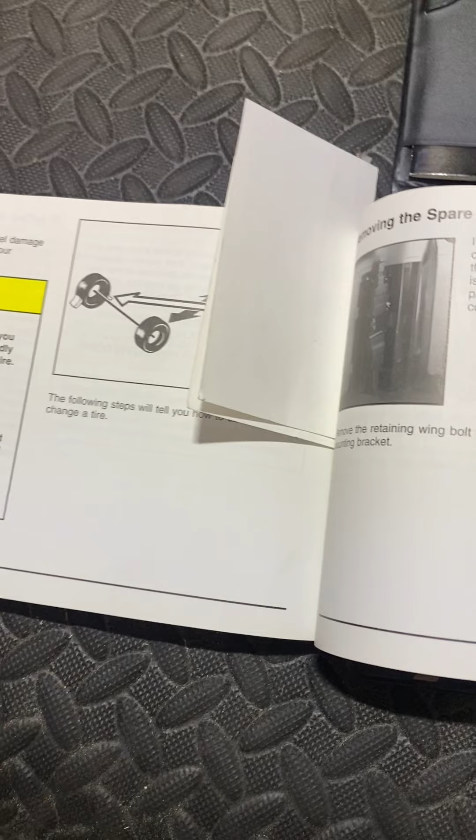Okay, so if you open your manual, which you probably don't have because you're watching this video, to page 5-66. I'm going to read this to you too, so that if you have to do this on the side of the road, you don't have to have your phone up to your ear.

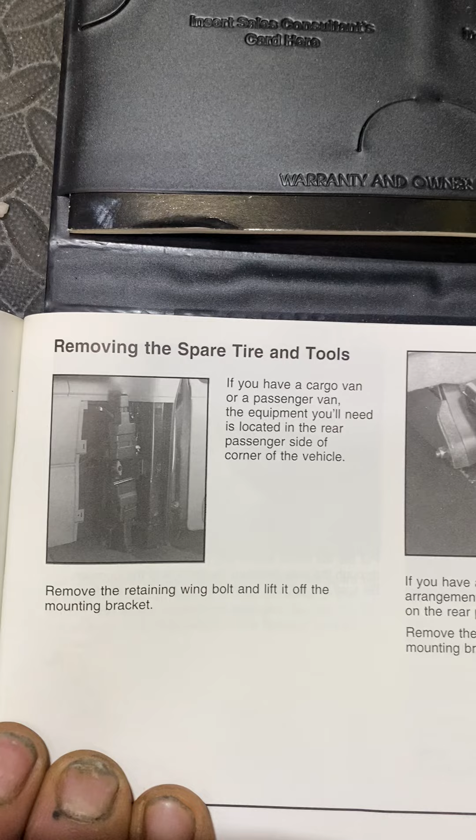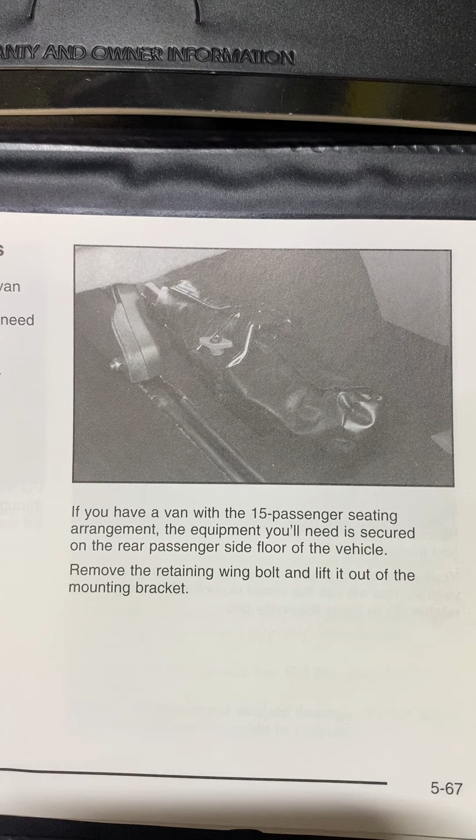All right, so first off, it's finding your spare tools. In my case, it's stowed in the passenger side rear corner. If you have a 15 passenger van, somebody's sitting on it, or whatever it says. Anyways, yeah, it's probably under the rear passenger side floor of the vehicle. Well, that sounds like fun. All right, on with it.

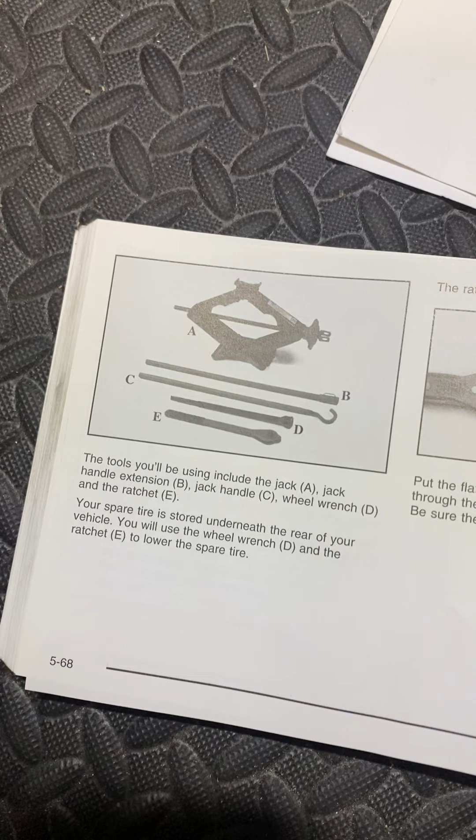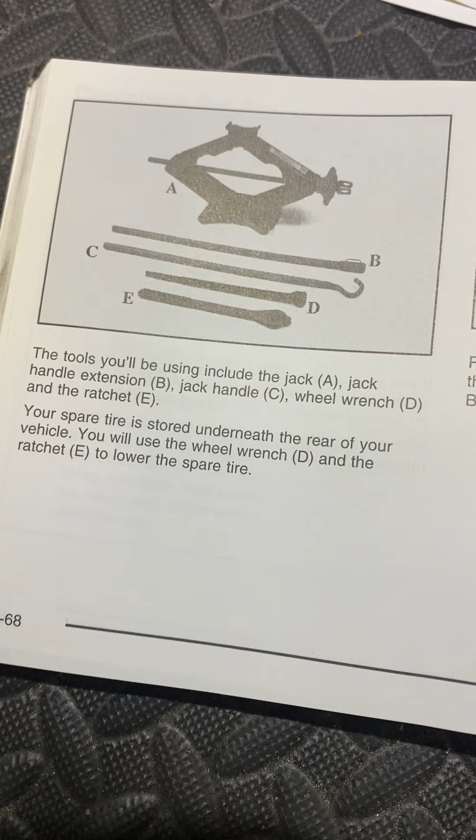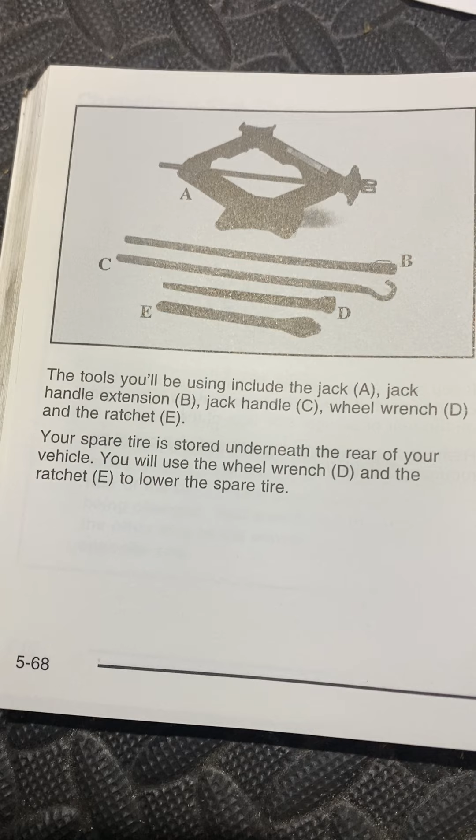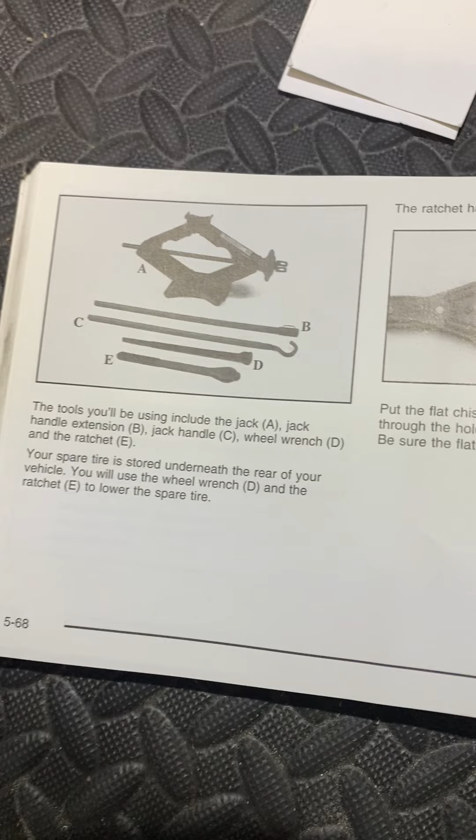Here's your tools that you're going to use, including your jack, which goes without saying, you're gonna need that. I also posted another video on how to fix this secondary jack clip, because if you blow a back tire, you're gonna be pissed. That's why I opted to cut my tab off and not have to deal with that thing seizing up on me again. So anyways, locate your tools, get your jack, everything, and your little ratchet, which apparently has a down and up setting on it, I guess.

Righty tighty, lefty loosey.

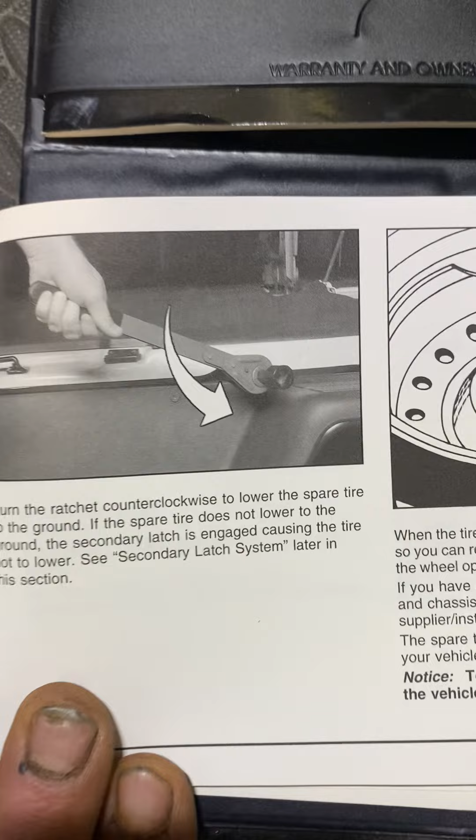So you're gonna go and locate your jack hole. In the back, if you open your back door, it's gonna be on your passenger side, just above your bumper. I don't know what this is saying, I'm just going off of whatever. Anyways, don't pay attention to my fingers, they're disgusting. I'm changing the oil on this pig again.

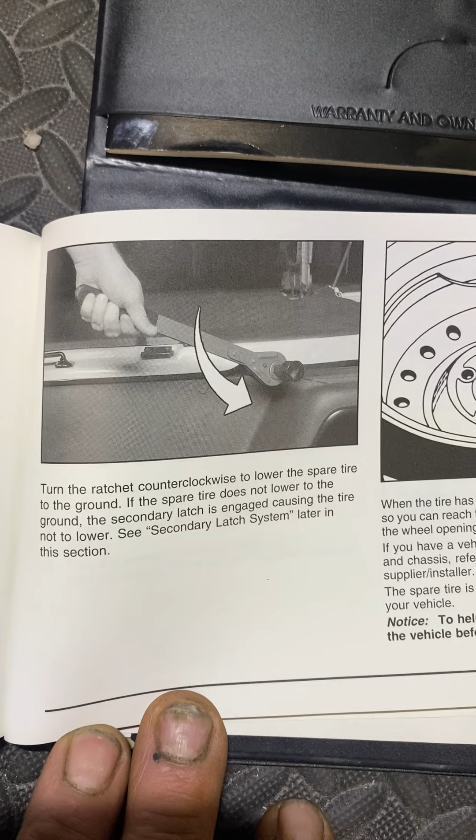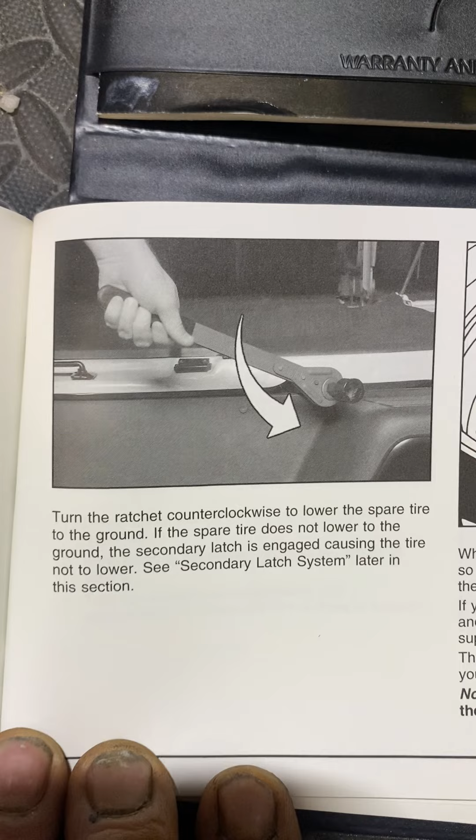So, secondary latch. Lower counterclockwise, obviously, like I said, lefty loosey, righty tighty. And if it does not lower, that means your secondary latch system is not disengaging.

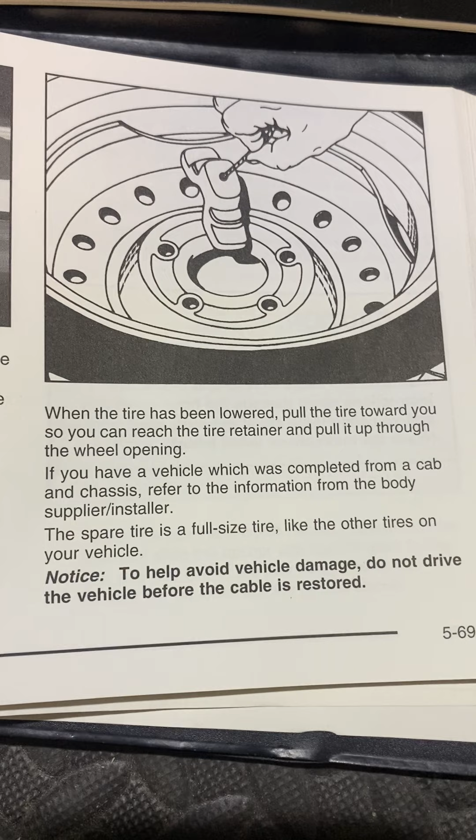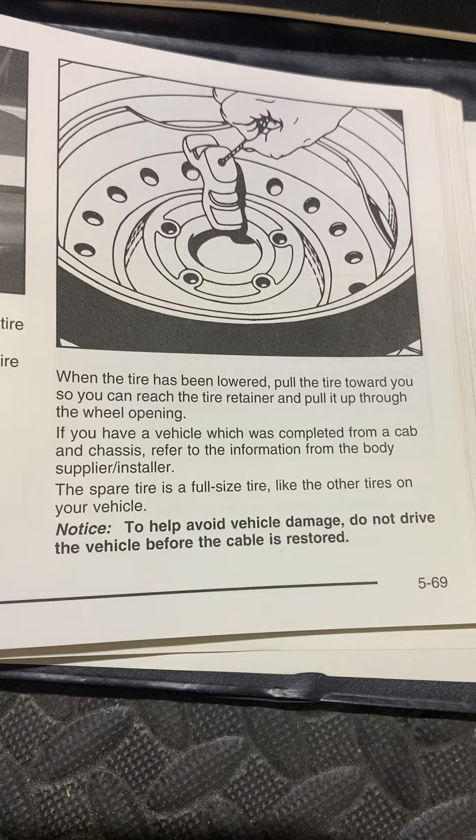However, I have a little thing to show you here so that you can understand what they're talking about, because it says when your tire has been lowered, pull your tire toward you so you can reach the tire retainer and pull it through the wheel opening. Yeah, it's not so fun because you can't get that freaking thing through the wheel. I mean, it's just a challenge because you have to have the thing propped up.

So yeah, and I apologize for the bouncing. I'm bending over, it's been a long day. Back is a little stiff.

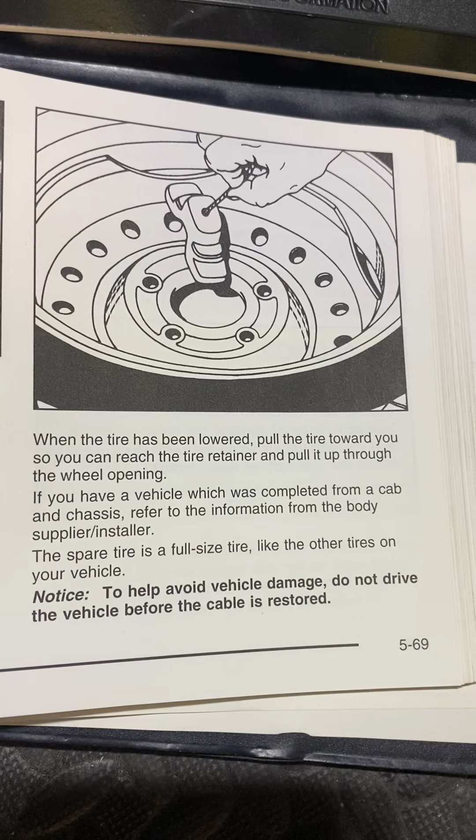So anyways, yeah, if your tire is full size, blah blah blah. Another thing to keep in mind is always keep your spare tire full of air. The one I pulled out of mine had 5 pounds in it, so that would have been really helpful.

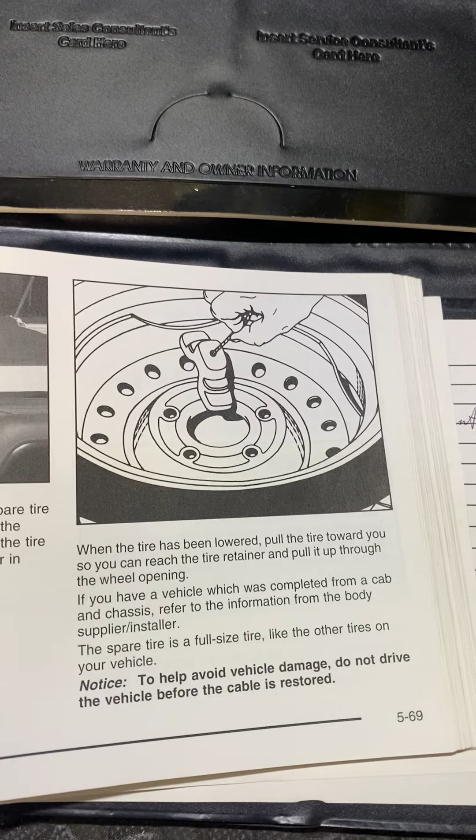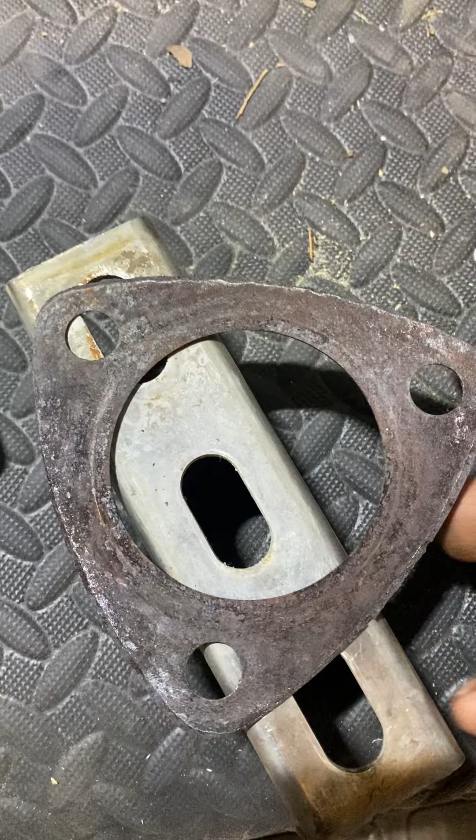Okay, so here's my little tutorial on this part here. All right, say this exhaust gasket, which I removed out of here, or no, actually I got this out of a piece of crap Saturn.

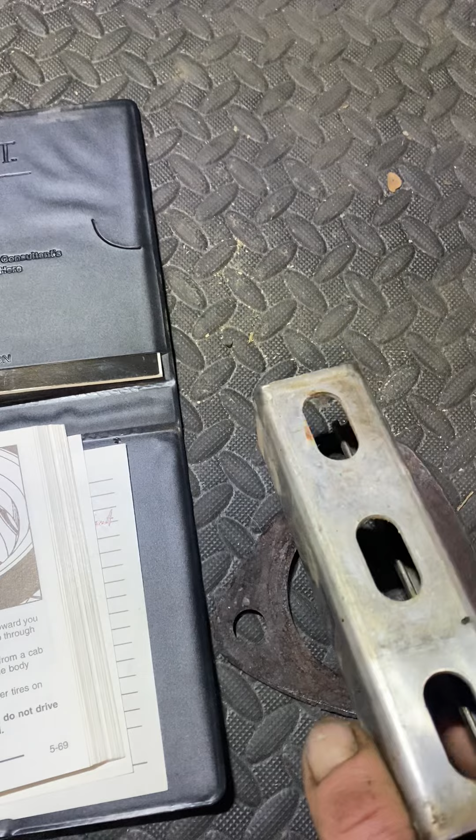All right, so say this is your tire opening right here, the center, where your holder is underneath. So you're gonna want to get the tire up in the air high enough to where you can get slack, because your cable is going to be coming out of this, coming up and through your tires. So you're going to want to get this whole thing up, and if I can do it one-handed, this is going to be awesome. Not really. But then you're going to want to get that sleeve with the cable, because the cable's coming out of here, remember. You're going to want to tip this up and slide it through the hole, and then your spare tire will be free. Depending on the condition of it, you might not be free to drive yet, but I am hoping that this helps and my nonsense doesn't screw you along.

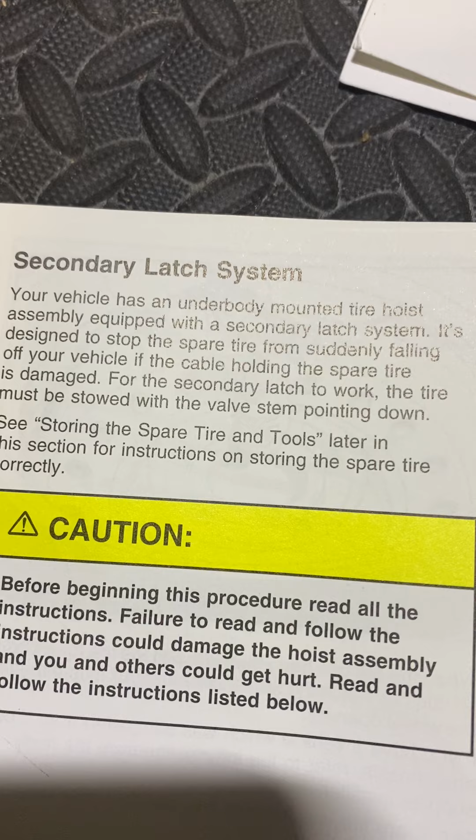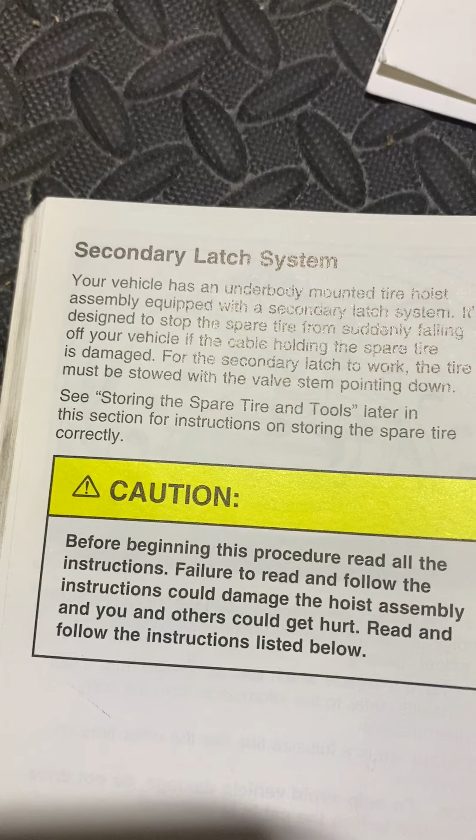Anyways, so your vehicle has an underbody mounted tire hoist assembly equipped with a secondary latch system. It's designed to stop the spare tire from suddenly falling off your vehicle and nailing the idiot that's tailgating you, which, I don't know, it doesn't say that, but anyways, if you're just listening you're probably getting totally misguided or getting bad ideas. So for the secondary latch to work, the tire must be stowed in the valve stem pointing down position.

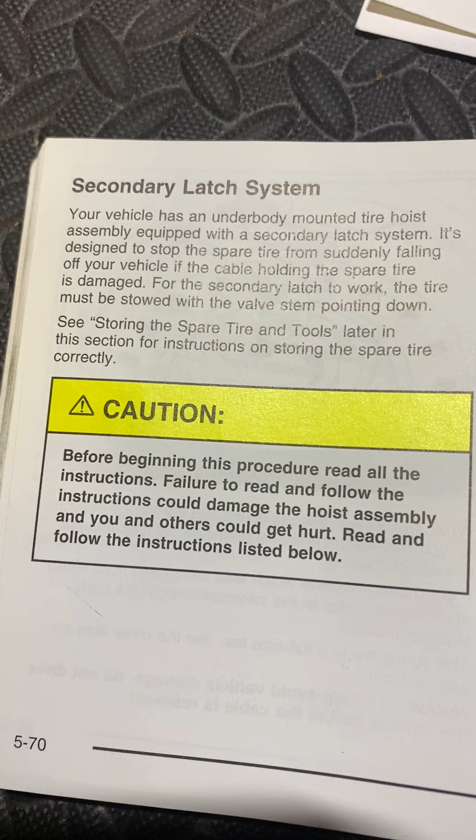Storing the spare tire and tools in a later section, whatever. Before beginning this procedure, read all the instructions - or I'm going to read them for you. Failure to read the following could result in damage to the hoist, or others could get hurt. So to release the spare tire from the secondary latch, do the following.

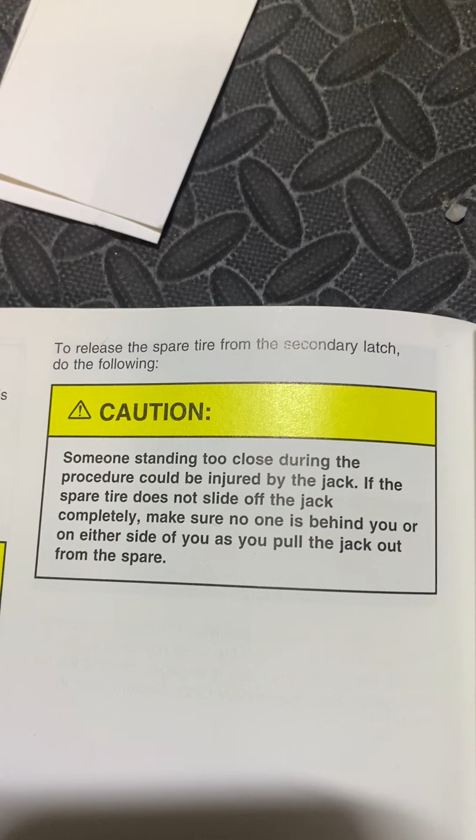Someone standing too close during the procedure could get injured by the jack, because the jack is very angry. I've known a couple jacks before and they were always pissed.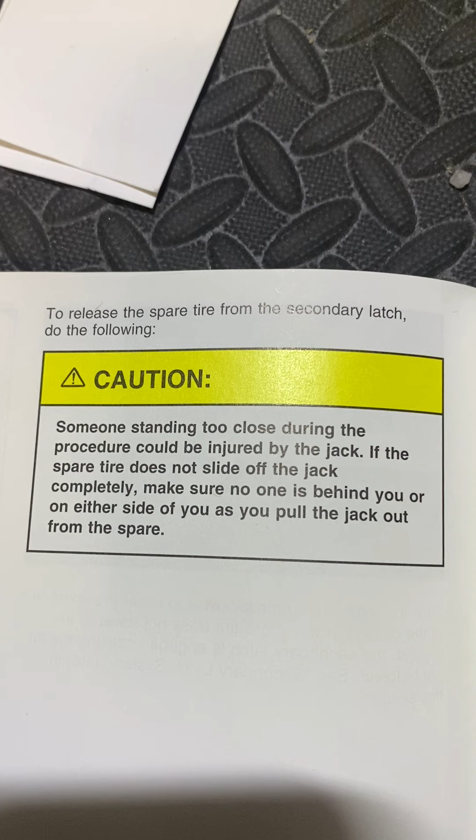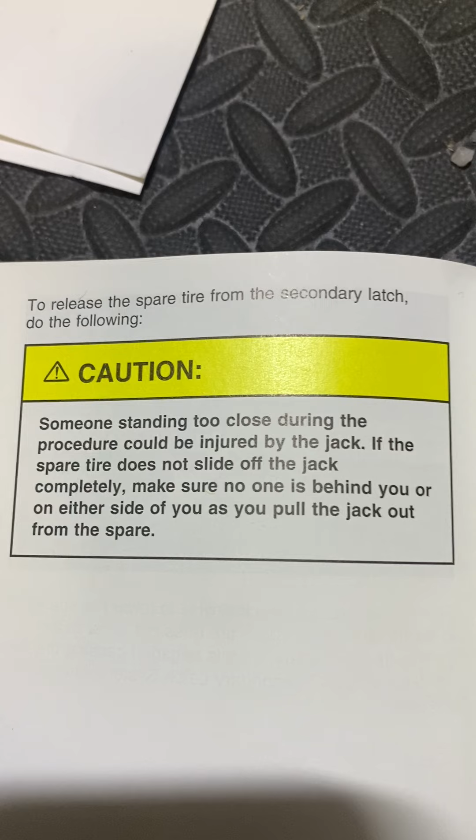So if the spare tire does not slide off the jack - wait, what? If the spare tire does not slide off the jack completely, make sure nobody's behind you or on either side of you as you pull the jack out from the spare tire. Why? Because you're gonna start crying, or you just don't want witnesses?

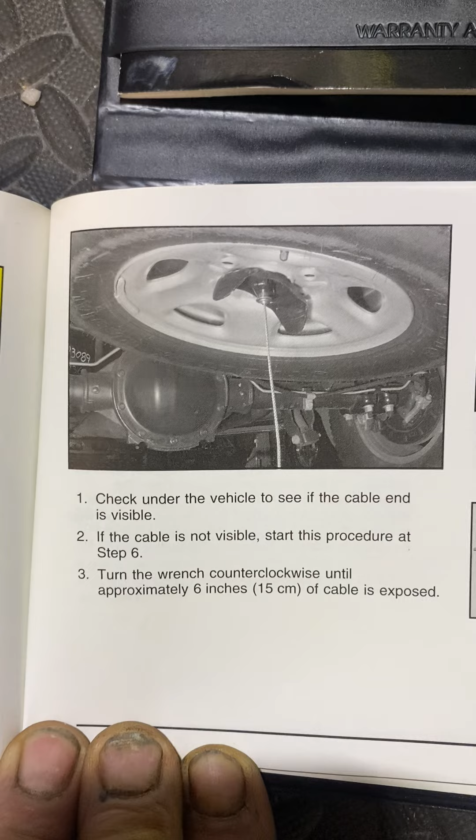Okay, so then check under the vehicle to see if the cable is visible, assuming you've already lowered the cable as much as you could. If the cable is not visible, start this procedure at step 6.

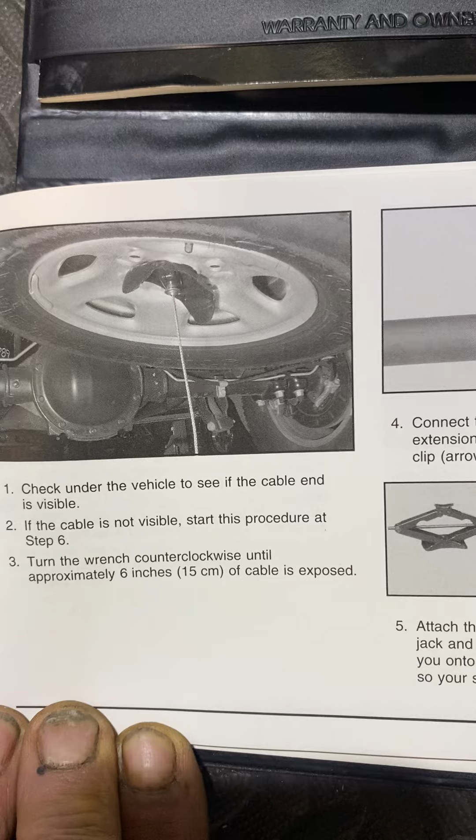All right, so we're still on step 3. Turn the wrench counterclockwise approximately 6 inches, or until approximately 6 inches of cable is exposed. And then you're gonna want to put this stupid little clip in, which always frustrates me. Connect the jack handle, blah blah blah.

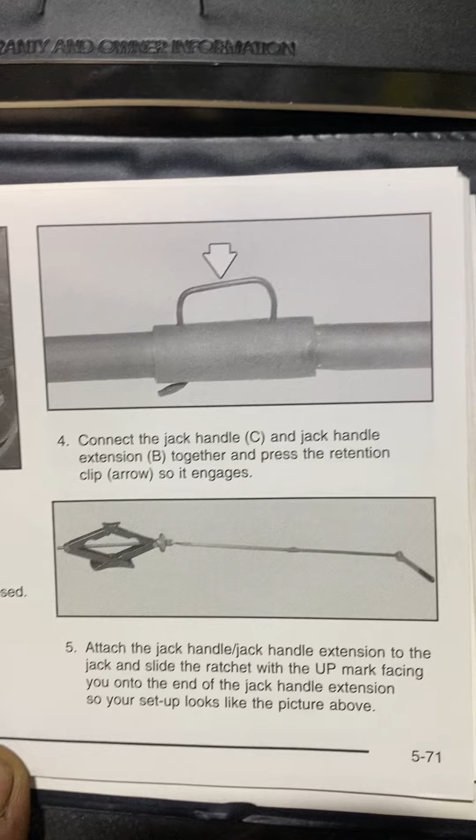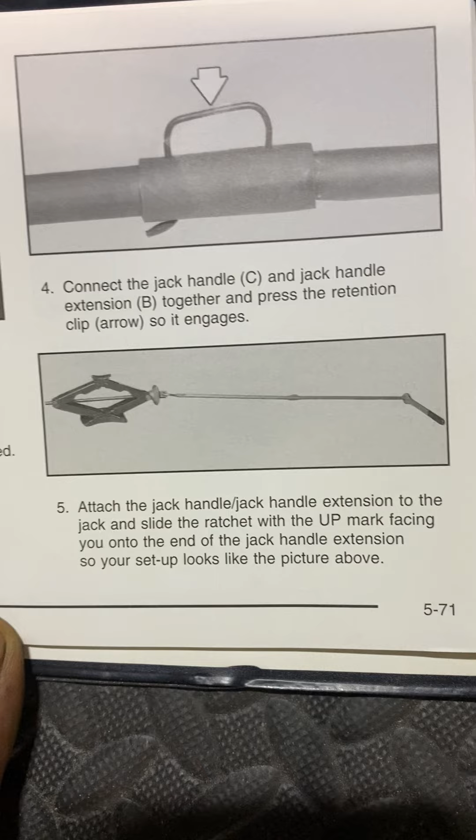Press the retention clip so the arrow engages. Attach the jack handle extensions to the jack and slide the ratchet, with the up mark facing you, onto the end of the jack handle extension.

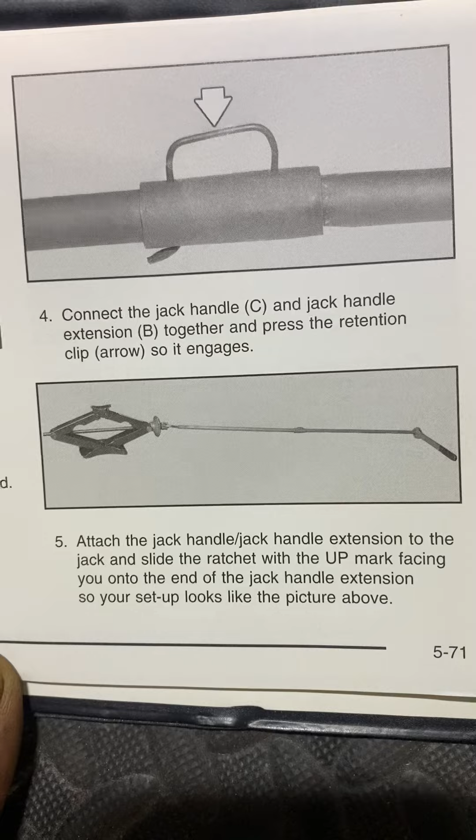So set up your looks. Wait. Oh. My poor reading - I'm reading through the camera and stuff. It's awesome. Facing. Okay, so I'm going to start over.

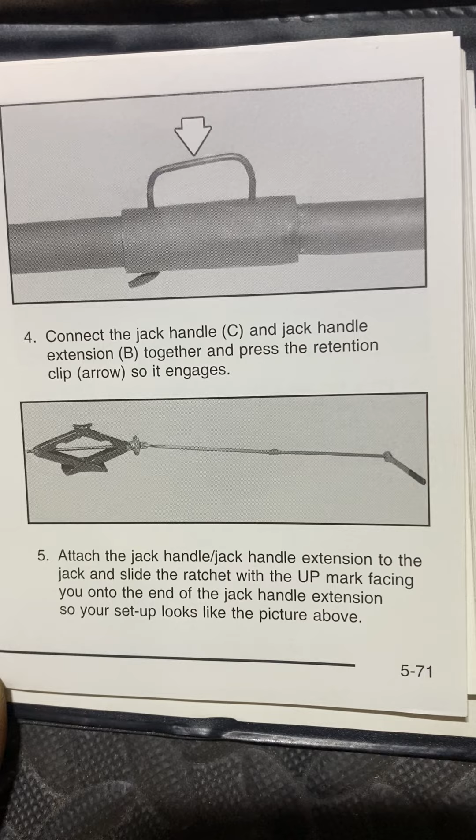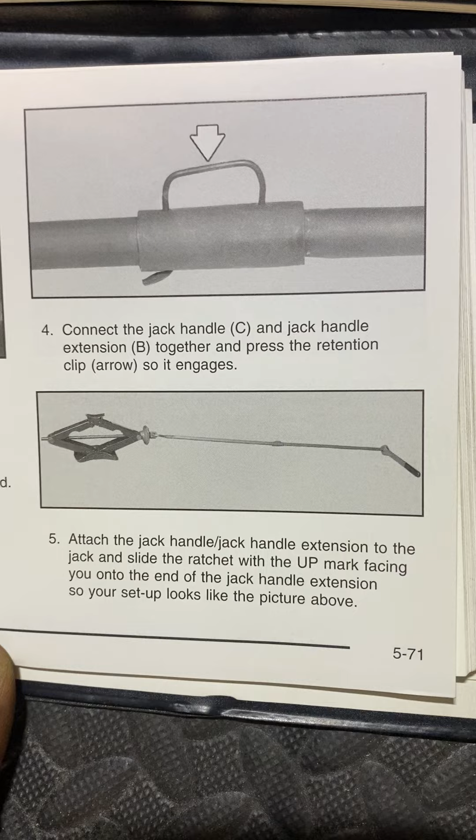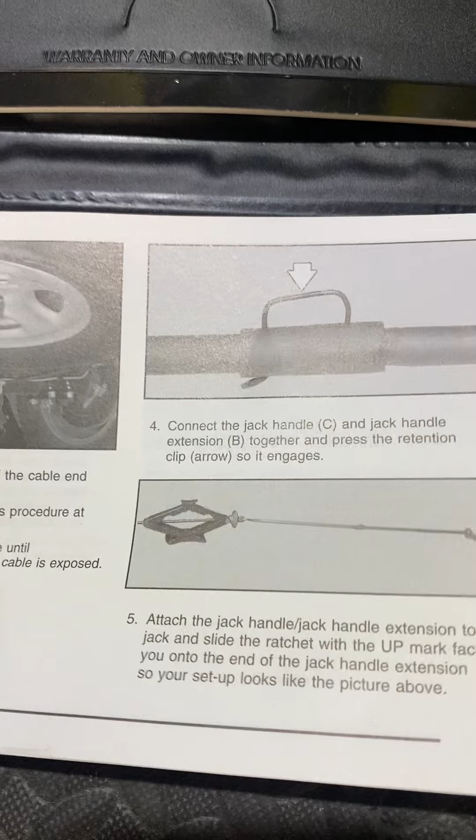Attach the jack handle extension to the jack - how kind of wording is that? - and slide the ratchet, with the up mark facing you, onto the end of the jack handle extension, so your setup looks like the picture above. Okay, well, add a band to the top of that and then you'd probably be okay.

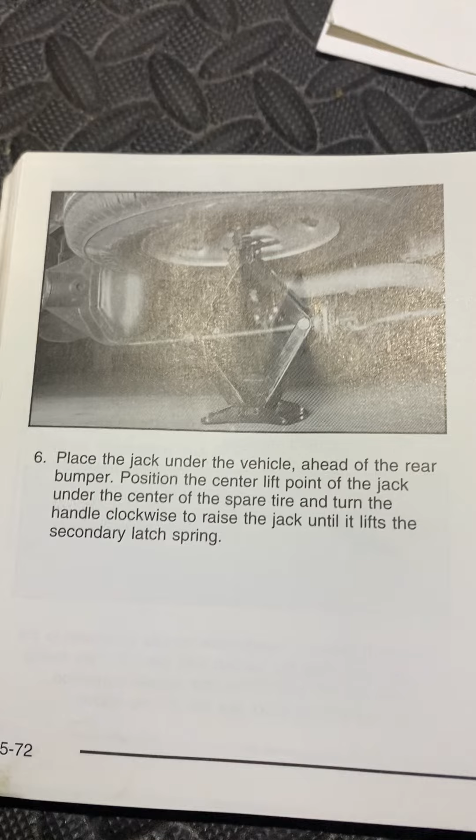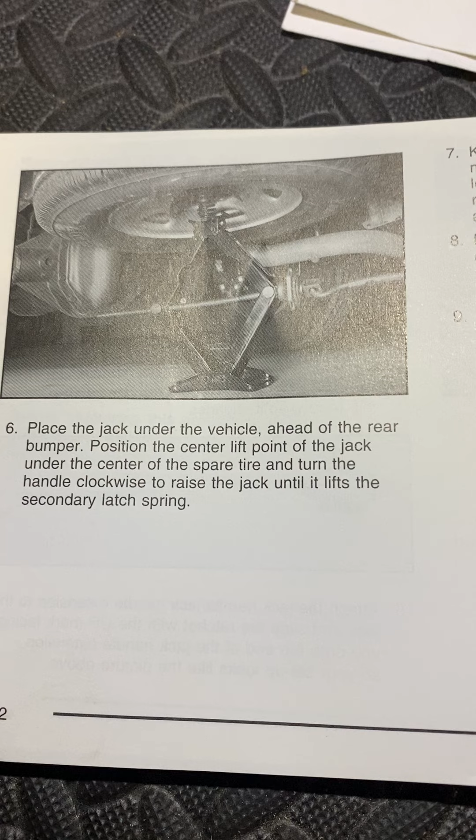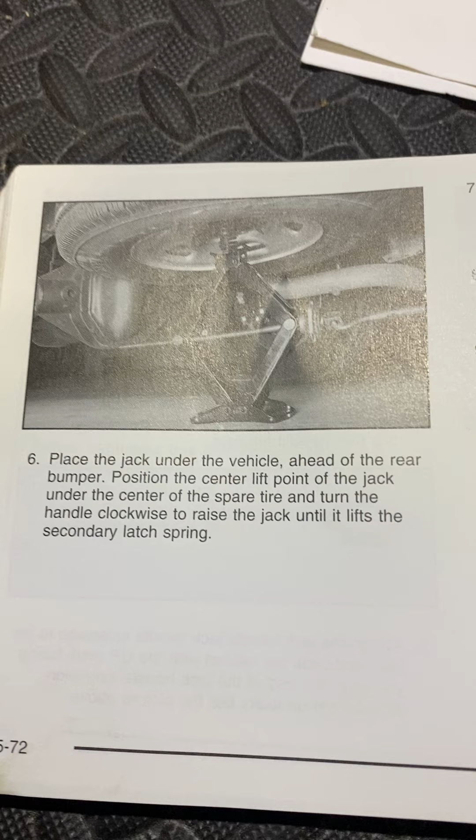So now, this is the joke - this is what really is frustrating. This is why I cut my secondary off, because if you blew a rear tire, you're gonna have a hard time getting this jack underneath there, and a hard time getting the spare tire out. So where is the second jack provided to get the vehicle off the ground, GMC? That's just a little ridiculous, because it doesn't make any sense - you're gonna be on your rim, which lowers you about 6 to 8 inches, and the clearance in the back of these, unless you're lifted, is very little. So it's gonna be very tough to get that jack under there if you blew a back tire.

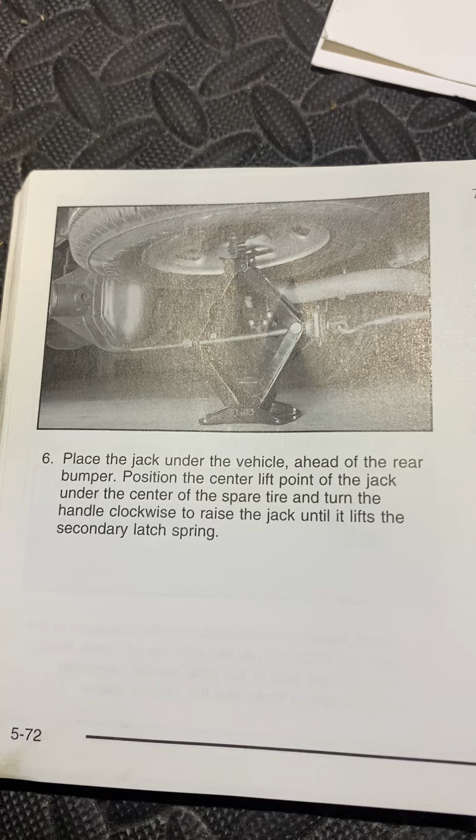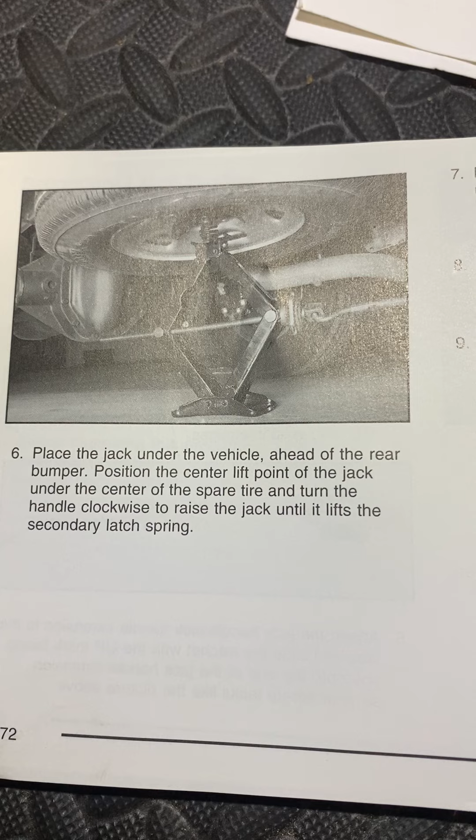So anyways, place the jack under the vehicle ahead of the rear bumper. Position the center lift point of the jack under the center of the spare tire and turn the handle clockwise to raise the jack until it lifts the secondary latch spring. You're gonna have to refer to my other video on how that latch spring works, because releasing it can be a pain, especially if it's stuck - you'll have to take off the rubber boot and pry it with a screwdriver to get it open.

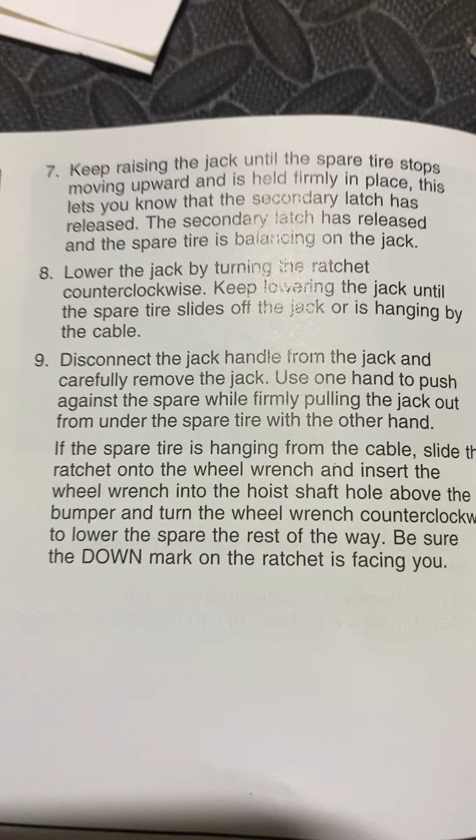So keep raising the jack until the spare tire stops moving upward and is held firmly in place. This lets you know that the secondary latch has been released - my ass, because it doesn't if it's rusted shut. The secondary latch has released and the spare tire is balancing on the jack.

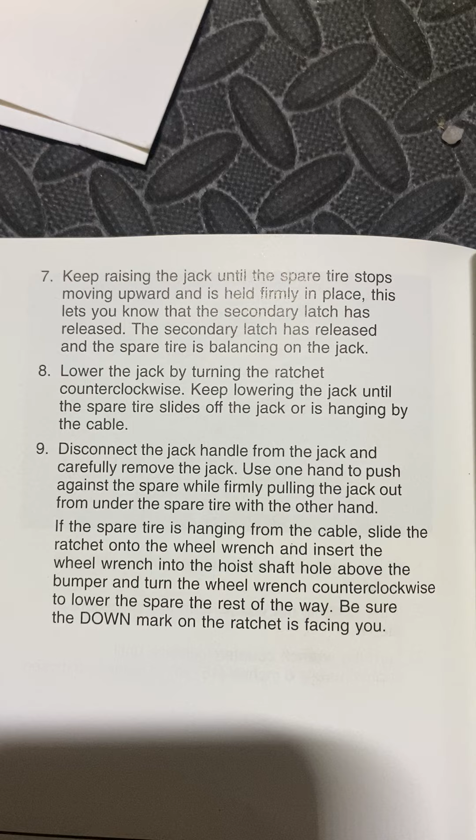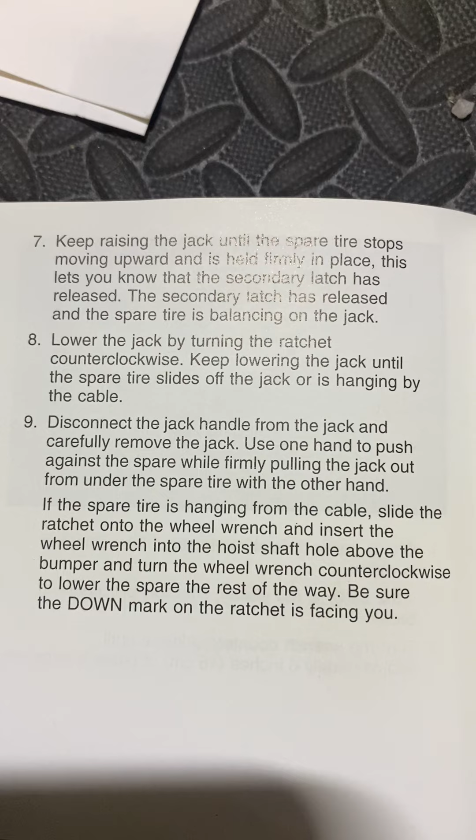So lower the jack by turning the ratchet counterclockwise. Keep lowering the jack until the spare tire slides off the jack or is hanging by the cable. Disconnect the jack handle from the jack and carefully remove the jack. Use one hand to push against the spare tire while firmly pulling the jack out from under the spare tire with the other hand.

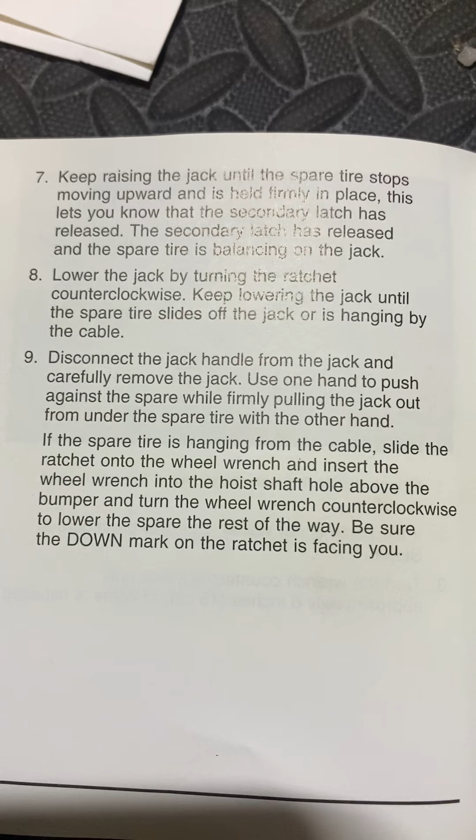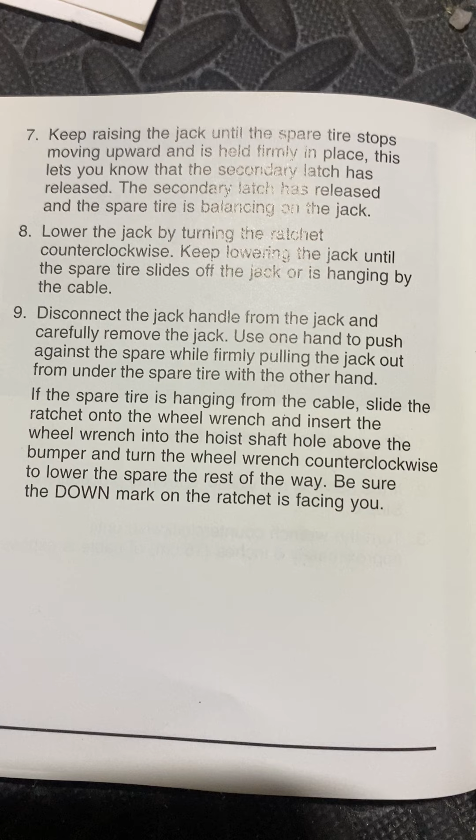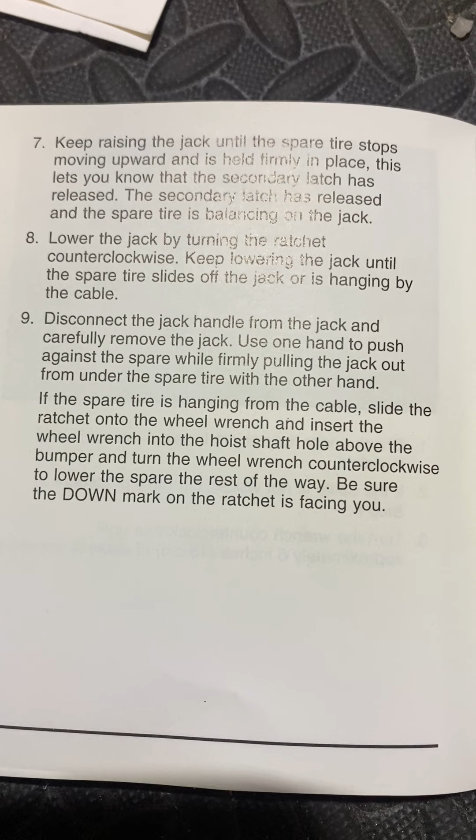Use somebody else's hand to wipe your tears, because you will definitely be pissed enough if that secondary latch is still stuck. So if the spare tire is hanging from the cable, slide the ratchet onto the wheel wrench and insert the wheel wrench into the hoist shaft hole above the bumper, and turn the wheel wrench counterclockwise to lower the spare tire the rest of the way.

Be sure the down mark on the ratchet is facing you. I just like saying jack hole.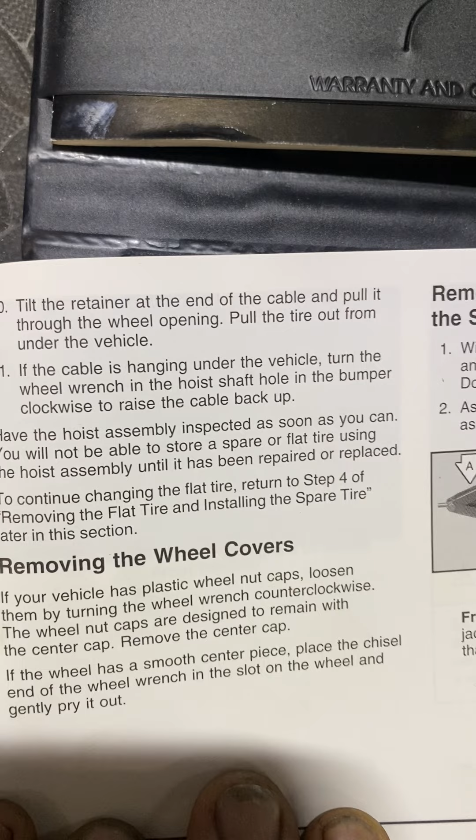Anyways, so tilt the retainer at the end of the cable and pull it through the wheel opening. Pull the tire out from under the vehicle. So that's what I showed you with that piece.

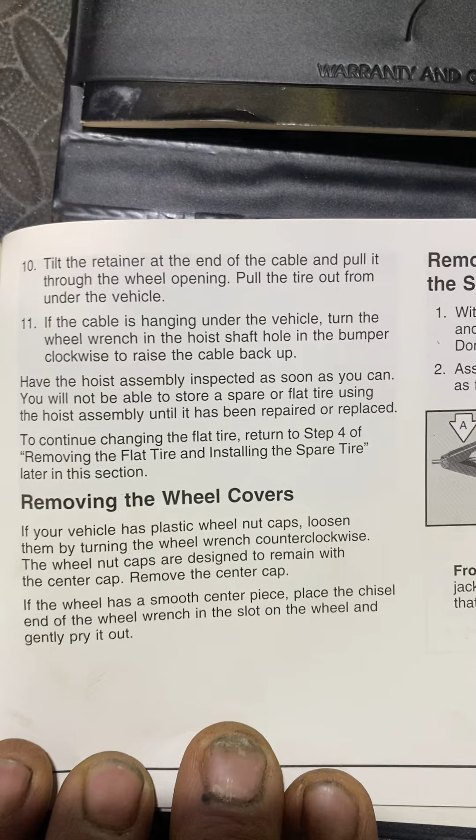Then have the hoist assembly inspected as soon as you can, because it's probably a rusted out piece of junk. You will not be able to store a spare or flat tire using a hoist assembly, is whatever. All right, so anyways, that is the spiel on that.

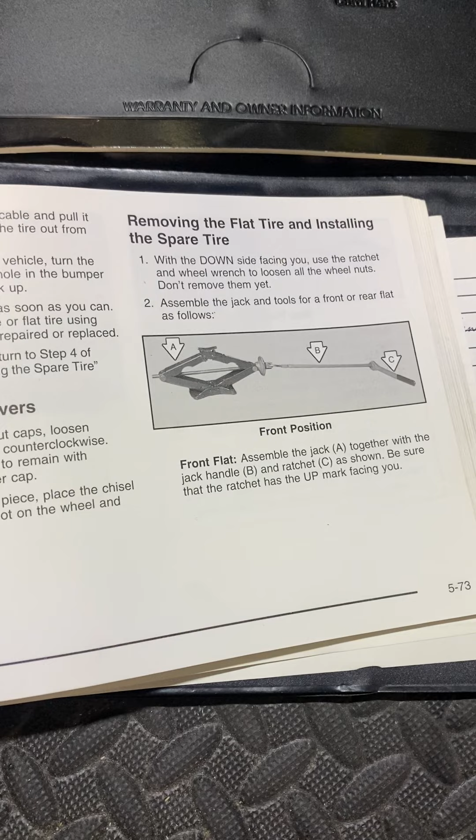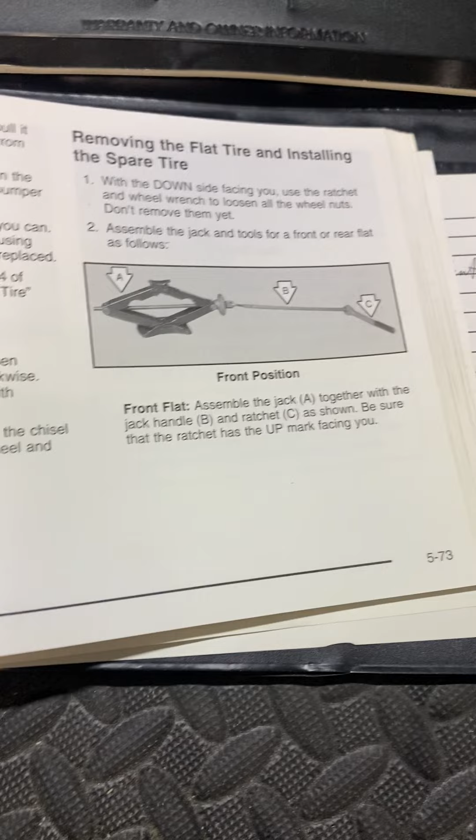I can't stress to you enough, just general maintenance. I gave you a couple tips on my other video on where to spray lube to keep that thing lubed up. Before you go on a trip, you should make sure that thing raises and lowers freely, your secondary jack works, or that secondary clip holder, retainer, whatever, works, or cut the damn tab off, because it's going to save you a lot of hassle.

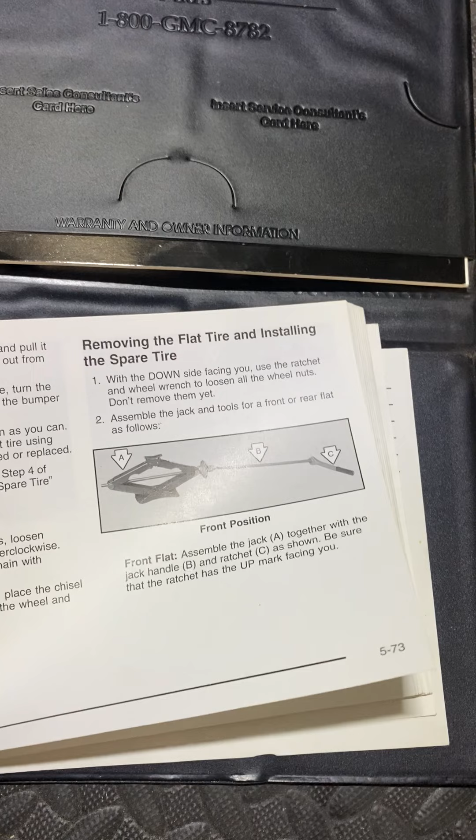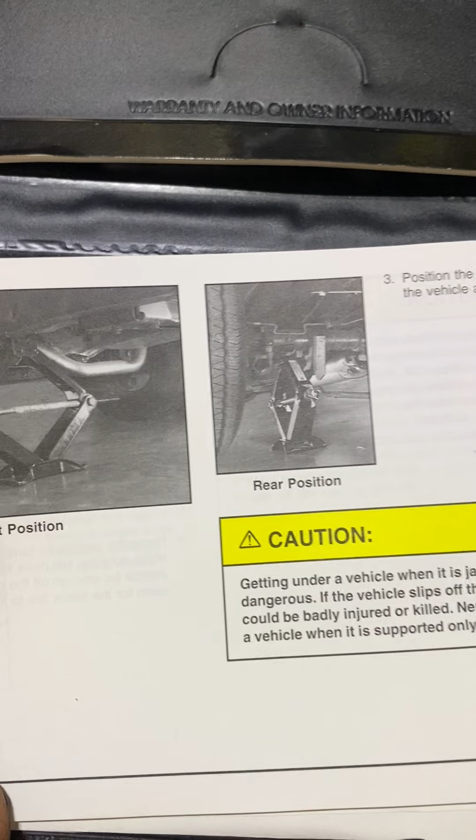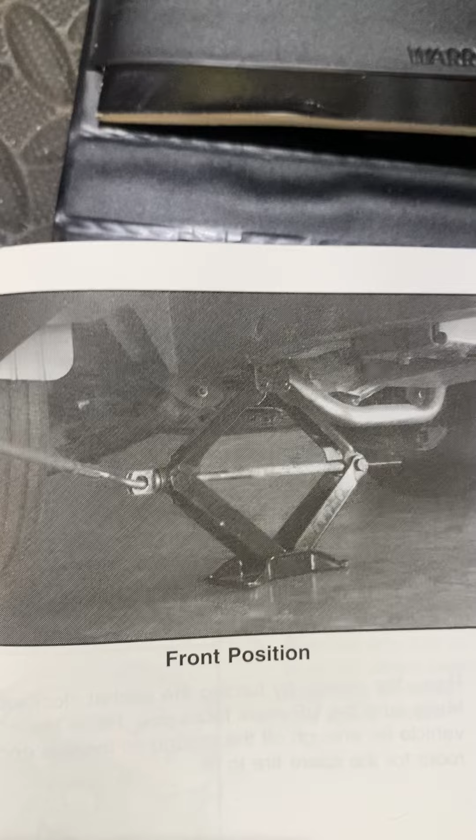And then, as far as removing your flat tire and stuff, I'll show you the pictures of the jack points, but it really doesn't do it any justice on these vans. It's always best to jack off of the rear axle, because otherwise you're going to be lifting the whole van. If you jack from your trailer hitch or any other point, there's actually a body mount or a frame mount that you can lift up the whole side of your van with if you wanted to. In the front, not sure what I'm looking at there, but it's got to be off the front frame carriage. Judging by the exhaust, it is behind the front wheel.

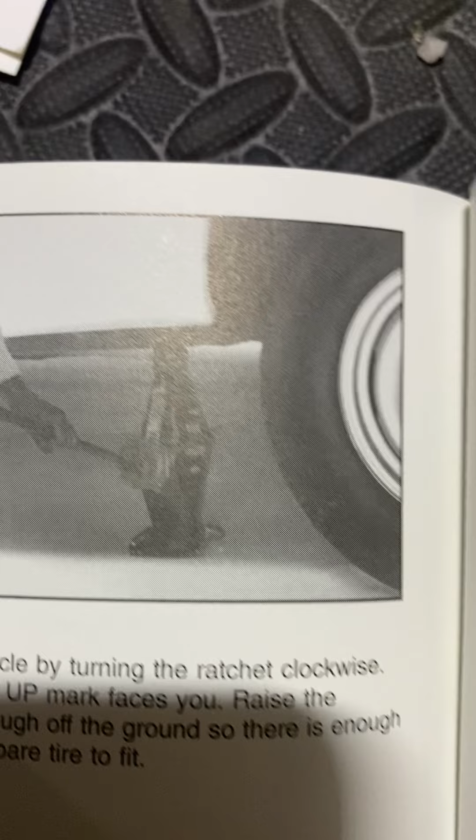So I'll kind of go over the positions. Well, it looks like this jack is trying to lift off of his body, which in most cases these things are rusted out. I don't know, I could be wrong. He's behind the wheel. There's a couple spots where you can jack off without getting in trouble. Anyways, I'm gonna go through this quick, and I apologize for the long video. What do you think, Blue?

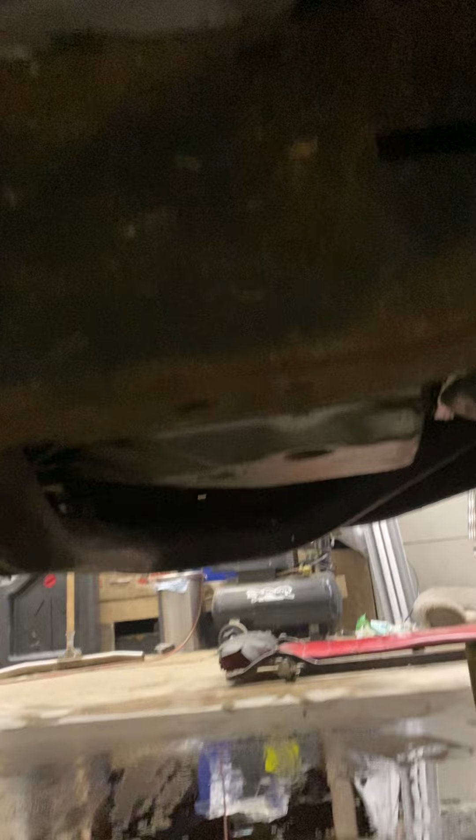Here we go. So, and I said I was changing the oil. So here is, we are behind the front tire. There's one flat spot here where you can actually get the jack on. You're not going to do any damage. Right now I have mine on my cross support just to raise up the front of the vehicle a little bit, and that's where I have mine.

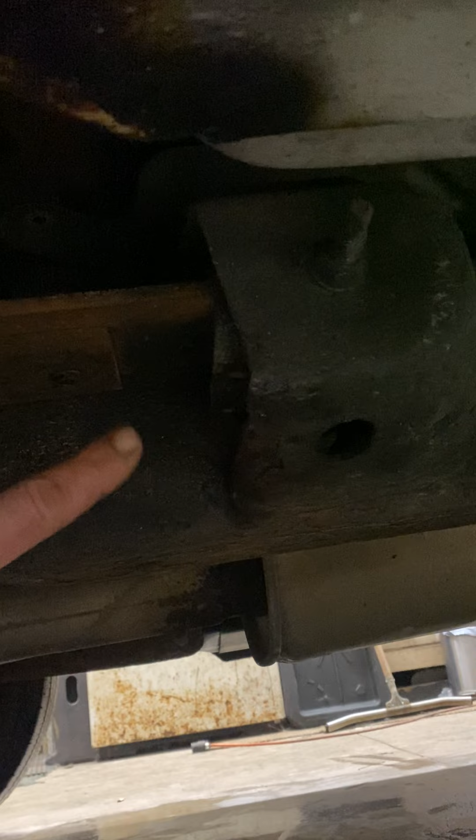So you can jack off right off of this corner of your frame cross member right there. And then as we head to the rear, there's a couple spots here. One is your axle, which is obvious, and your other spot is going to be right there. So you don't want to jack off on your leaf spring perch, just because the integrity might not be all that good, and I've seen those things rot out.

But you want to be right here on the frame, generally speaking, because if you can get that jack to lock in a hole, you're going to be way better off. And never forget to chock your tires. Block them somehow, I don't care if you use a rock, a small child, midgets are good too. Sorry, politically incorrect. Or you can actually, if you need to raise up your whole vehicle, you can go off of the bottom of your hitch point.

So, God, I hope I covered everything. Can't think of anything else that I missed, but I hope that this helps you if you're stuck on the side of the road. And just a little general maintenance is going to be huge. So, good luck.